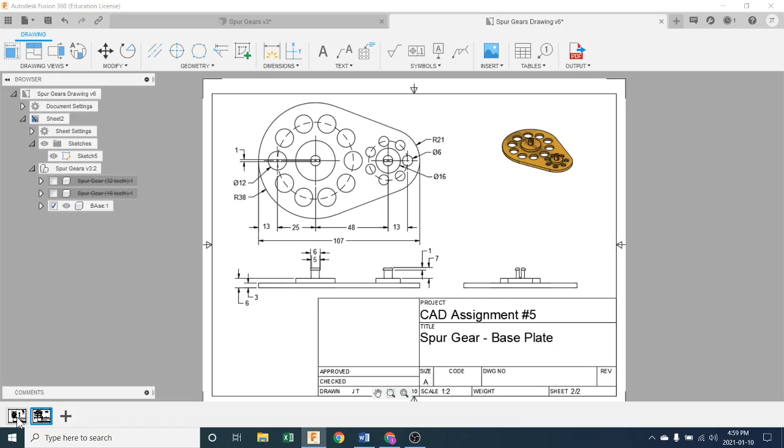So this is our goal. Once we finish drawing this, as it is a drafting course, you will of course draw an orthographic view drawing of this, which is less scary than it looks. There's also a gear drawn, the 32 tooth gear.

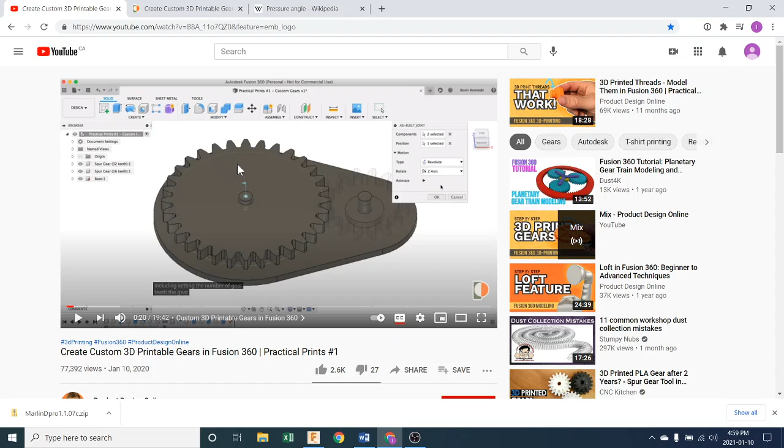Full disclosure, I didn't come up with this on my own. I surfed the internet and found a nice tutorial by Product Design Online, and just made a few modifications for our purposes, but this is where I'm pulling from. Feel free to visit, there's quite a bit of stuff here that's good. One of our future exercises will be to have you find something to draw that you want to draw and teach yourself, so think about that, or this location, when I mention that.

This tutorial's resource page is here, productdesignonline.com, page 1 I guess it is, P1, and that would take you to this place where he basically step-by-step walks through what he's doing in the video and adds a bit more information, like gear terminology. We're going to talk about gears later, but there's all sorts of terminology here that comes into play that might be interesting. Gets into a bit of engineering.

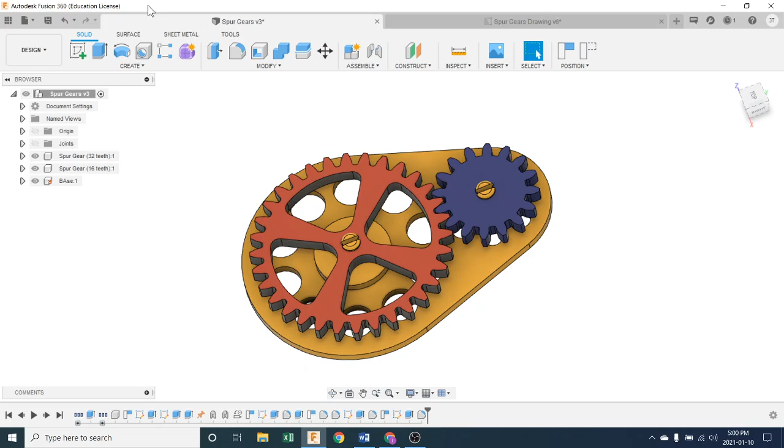So without further ado, let's jump back into Fusion and begin. Where do we begin? Well, at the moment we are going to start a new design, and I'm going to first off save it somewhere. I'm saving it to drafting 10, and I'm calling this the Spur Gear tutorial. You call yours what you want. Save, and let's begin drawing gears.

Now, you might think that we would start by creating a sketch and then drawing a gear and maybe extruding it, which is totally possible. However, it involves understanding of how gears are made and some math and all that sort of stuff, so it's easier than that.

Something that we haven't covered yet in Fusion is the idea that there are add-ins. Hit your S key, bring up the shortcut toolbox, and type in scripts, and you will get scripts and add-ins. Click on that, and when you do, there's a whole bunch of add-ins that actually came when you loaded Fusion. There are more add-ins that you can add as well. Maybe we'll cover those later, but at the moment we're looking for the one that is Spur Gear. So go to add-ins here, not scripts, go to add-ins, and we'll go find Spur Gear.

There's 2 kinds here: one is C++ based language, one is Python based language. We're going to go with the Python one here and stick with this, so you stick with me. So Spur Gear, and then when you do that, you're going to hit run. Notice what it says here: the Spur Gear command has been added to the Create panel of the model workspace, and that's up here. So we'll push OK. If I go up to Create, you'll see that I can now make Spur Gears.

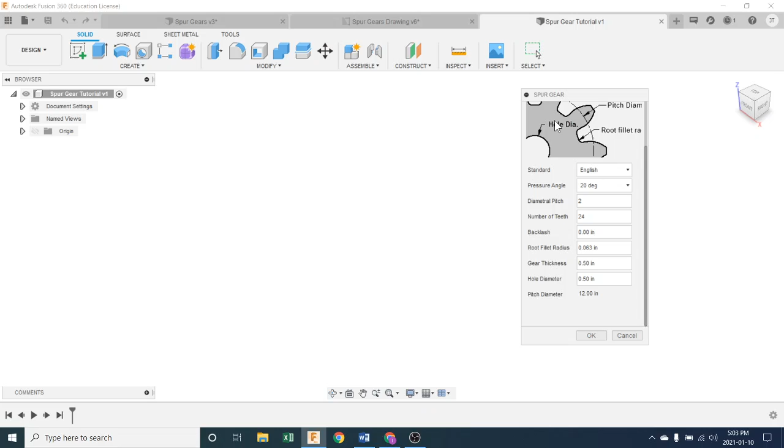Okay, so I'm going to go create a Spur Gear, and a menu comes up, and this is the all-important menu. It's just asking us a series of questions about the gear we'd like to create. We're going to create an English standard gear. Some of the details of a gear are shown up here to help us.

The pressure angle is a technical term. I had it here in Wikipedia, and if you want to go into the details, it's basically a very specific way of describing the angle at which the pressure is going to be applied to the tooth. All you need to know is there are some common angles - 20 degrees is the most common, and we're going to stick with that.

So the next one - I've got the numbers in already. Yours might be different, since it's remembered the last thing I drew. You might have something totally different, like 64 teeth. Let's go up here and make this, I don't know, 12. And let's go down here - I'm just messing it up so you can see.

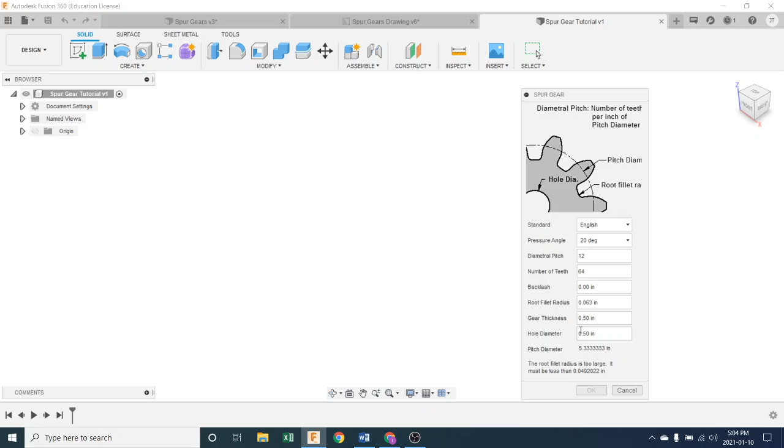Okay, so what we've got going here - oh, I just noticed everything's in inches. We're going to work in millimeters, so jump out of this for a second, cancel, go up here to documents and change your units to millimeters. And there we go, we're in millimeters. Push OK, and you're probably thankful we're working in millimeters. Head back to making a spur gear, head back into this.

So what we're looking for is a spur gear that's 32 teeth. And then we would like it to be a certain diameter. Right now it's like 400 millimeters, and that's 40 centimeters, which is over a foot, and that's too big. So what we want to do is change a few things here.

So module is important. Module is basically taking something called pitch diameter and dividing it by the number of teeth, or the number of teeth divided by the pitch diameter - I can't remember, I'll show you in a second. Pitch diameter is this circle here on the outside that basically helps us with intersecting the second gear that would come in, and it's the line on which they would intersect essentially.

So we would like that to be 64. That makes this module thing 2. Now, module is pitch diameter divided by number of teeth - that's what it is. So if I have a pitch desired, which is in this case 64 millimeters, and I divide by the number of teeth desired, I will arrive at the number I need to put in something called module. So it's 2 for the module, 32 for the teeth.

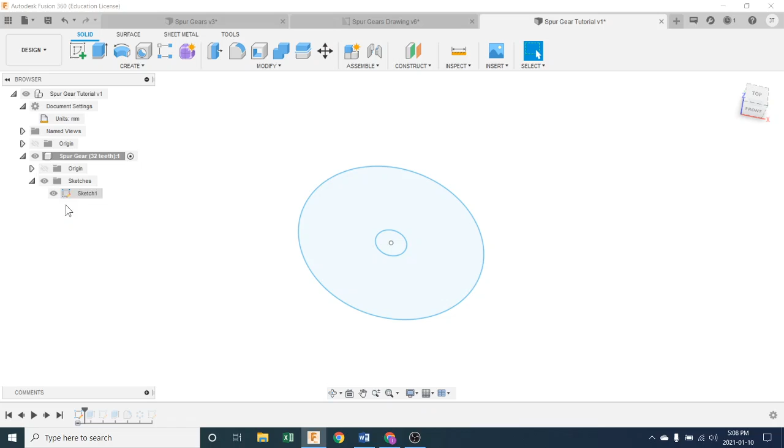The first thing it did was a sketch. Now you can't see it because I have to turn the sketch on, but it did that. And the second thing it did was it extruded the sketch to 5 millimeters. The third thing it did, it drew another sketch. So I'll turn that one on.

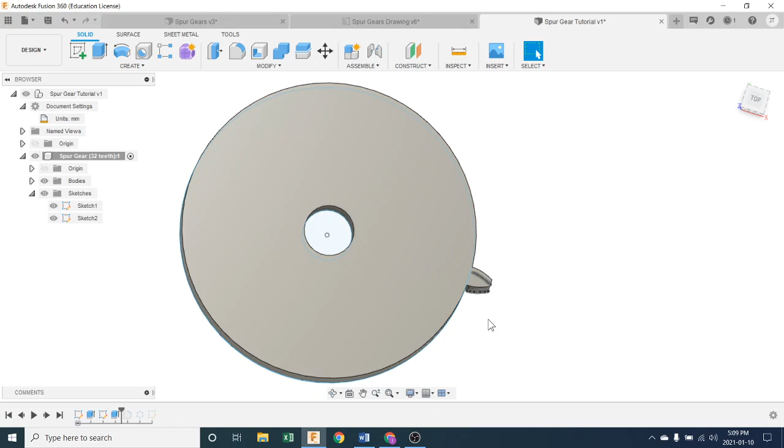And what's that a sketch of? Well, looks like the first tooth that it wanted to make and the profile of that tooth based on what the add-in knows about how to make gear teeth that we don't. Then we go to the next step and you can see it extruded that to 5 millimeters. And I'm going to click ahead to the next step, and it obviously put a radius in down here, which is based on our, well, we put in a radius of 0.15, so that's in there.

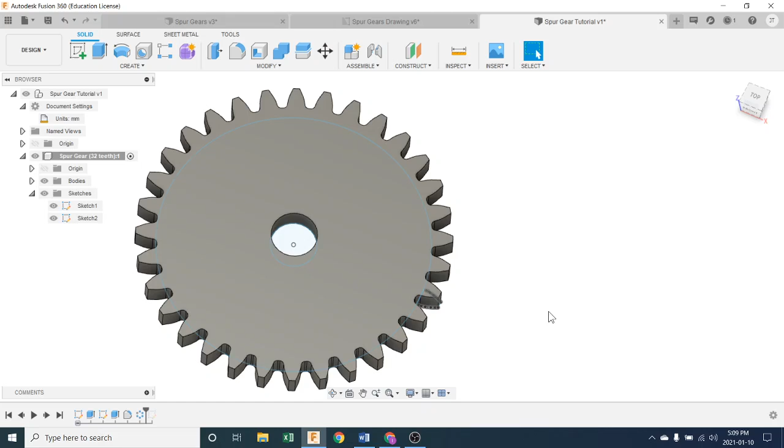And now we're going to go ahead, and it did a circular pattern, because we know up under here you can create patterns, and one of them is circular, so that is right down here. You see it says C pattern. That's what it did, and it made a circular pattern all the way around. And then the last step was one last sketch.

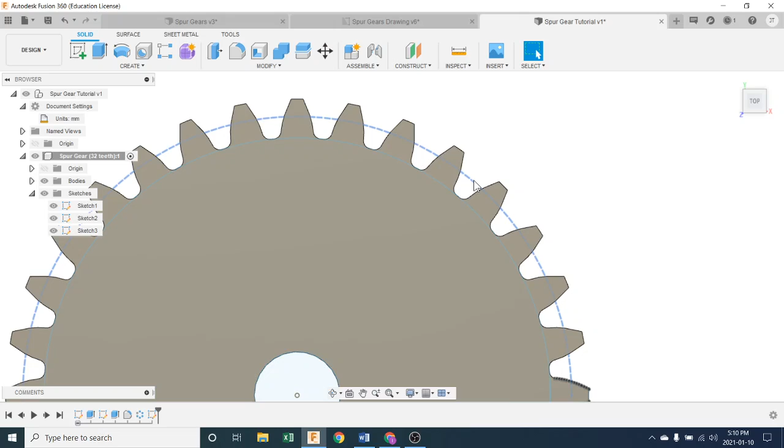Now let's have a look at this last sketch. Well, we can see it, it's on. I'll hit top so I'm looking down directly at this. It's drawn in the last sketch this line, and this is that pitch diameter that is going to help us with placing the intersecting gear. So that's what it did. And it put it in a group, which is nice and tidy.

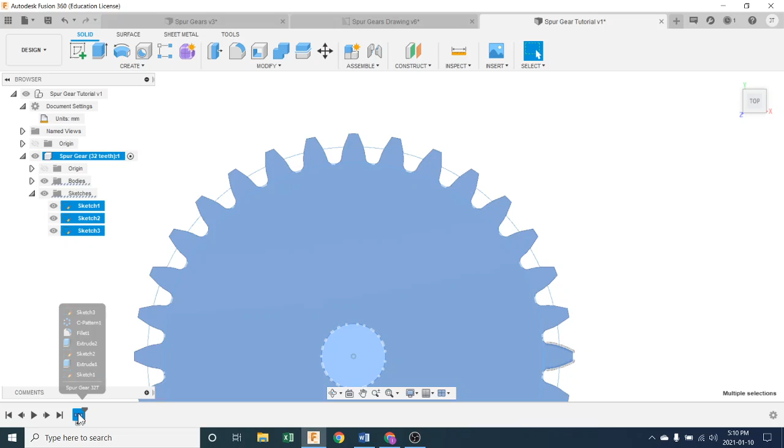I can hit the minus sign and the group will be collapsed. I can right click. I can rename my group and call it Spur Gear 32 Tooth. And hit enter. And now if I were to hover over the group, it shows me all of the steps in the little window there, but also at the bottom it says that's the Spur Gear 32 Tooth. Cool, right? Basically, that's how easy it is to draw a spur gear.

Now in the next video, we are going to talk about bringing in or creating a second gear and how to mesh it with this one. So that's it for this video.